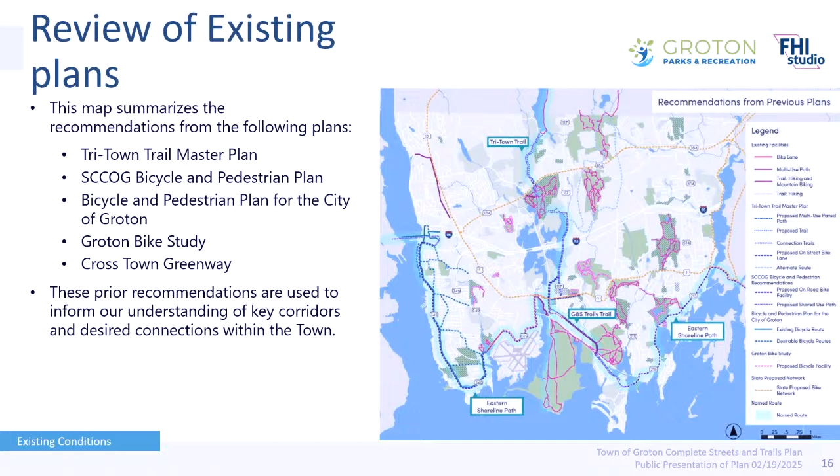As we put it all on the map, we see a lot of different facilities that have been recommended or planned. Some of these are just ideas, others are further in development, including the Tri-Town Trail Master Plan. SCCOG also did a bicycle and pedestrian plan recommending routes. The bicycle and pedestrian plan for City of Groton has their own plan. The Groton Bike Study, the Cross Town Greenway, which we've been actively involved with. We've mapped all of that, and that was really the first step in identifying where our network is and what needs to be connected and what roads should accommodate bicyclists and pedestrians.

We mapped out all your existing facilities, of which there aren't many when you look at bike facilities or facilities that can accommodate bicyclists. A lot of your facilities are bike ped - they serve both walkers and cyclists. We've got along Route 12 connecting to the sub-base, a really nice length of pathway that accommodates bicyclists and pedestrians. We've got a segment along Route 1, close to Poquonnock Plains Park and approaching the middle school. We've got the trolley trail here, a little tiny segment on Gold Star Highway.

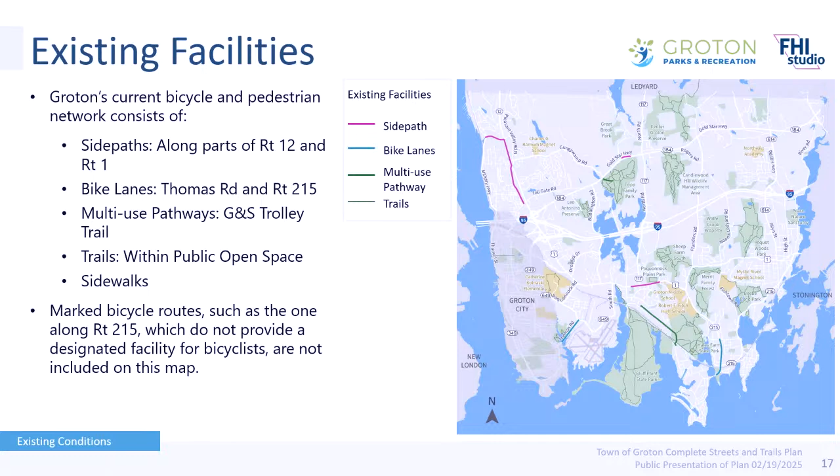It's really more of a wide sidewalk than anything, and then a few bike lanes, on Thomas Road and 215. But these things are scattered, and at best they're a mile long, quarter mile, half mile. So that really speaks to a need to connect, to infill and connect all of these.

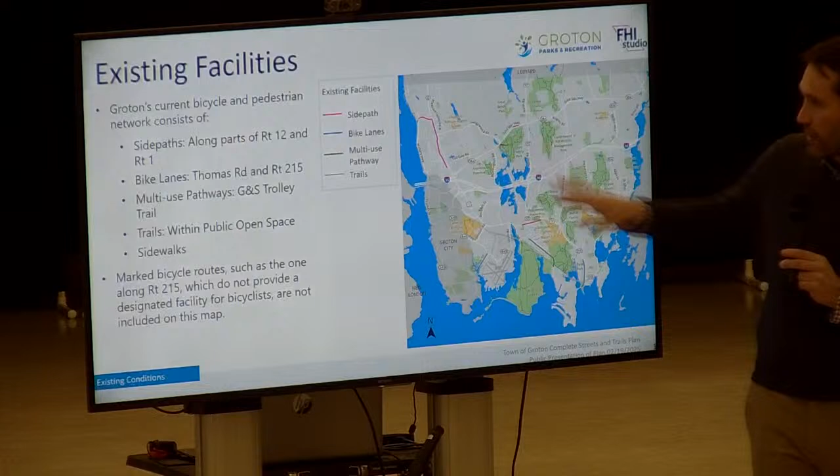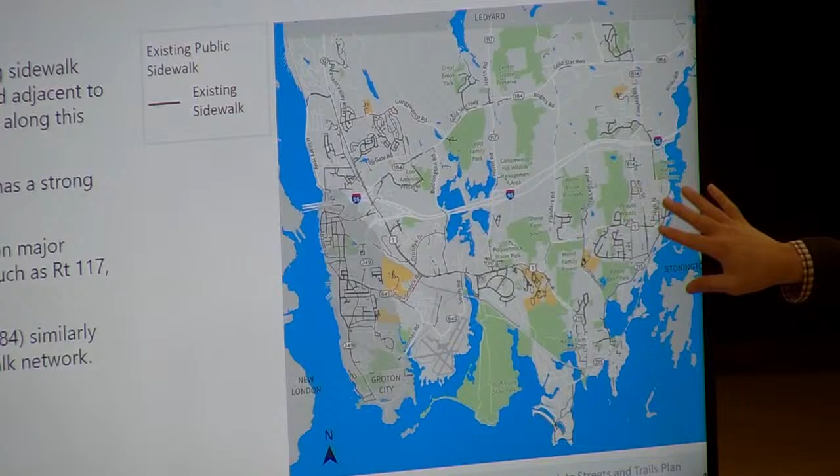We see the same when we take a look at your sidewalks - I realize you have a hard time seeing from back there on a small screen, so I'll try to describe it. You do have sidewalks across town, but the network is very fragmented. Sidewalks on one side of the road, but not the other. Sidewalks with gaps for one property, several properties for a mile, whatever it may be. So we've also provided recommendations for strategically connecting this sidewalk network so it's possible to walk without having to walk in the road or cross the road to get to the sidewalk on the other side.

Early in our work, we try to understand where the busy roads are. Busy roads are really challenging for obvious reasons. They carry a lot of traffic, the speeds are often higher, and it's difficult for pedestrians to walk in the road with that kind of traffic, for bicyclists to cycle in the road with that kind of traffic. So we know that these roadways here are going to be challenging. These are principal arterial and minor arterial and collector roads, many of them state highways. Fortunately, we have a lot of data available for many of these roads, unlike local roads for which we might not have speed or volume data.

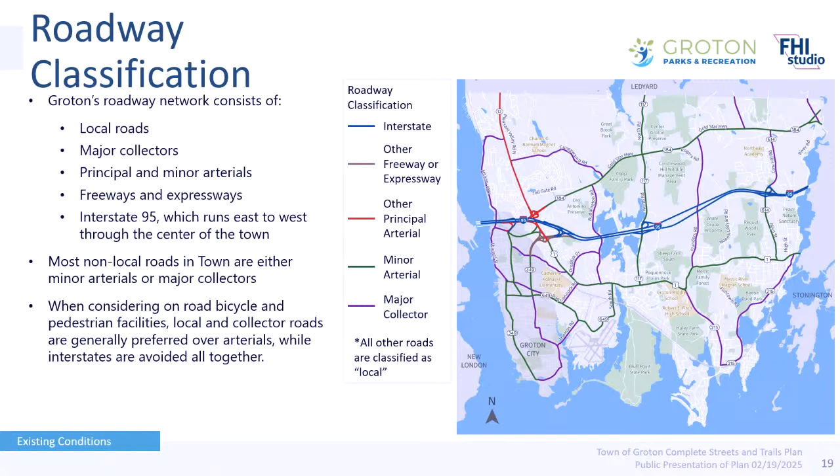So we can understand what the needs are. The recommendations we make are based upon multiple factors, but two very important ones are traffic volume and speed. Traffic volume makes it very uncomfortable for someone to walk or bicycle in a road with a lot of vehicles for obvious reasons. It also, just by factor of numbers, increases the probability of a crash occurring because there's more vehicles. Then speed is the other factor, and speed is really the primary safety factor. Lower speed roadways, even those that carry a lot of cars, if they're very low speed, tend to be safer roadways than higher speed roadways that carry less traffic.

So these are the conditions we're aware of, and we know we can't really change traffic volume. You can change speed a little bit with certain improvements, but we're very limited on our state highways - we can't do aggressive traffic calming. So we don't have a lot of control over speed either. Periodic enforcement can help, but that's only temporary.

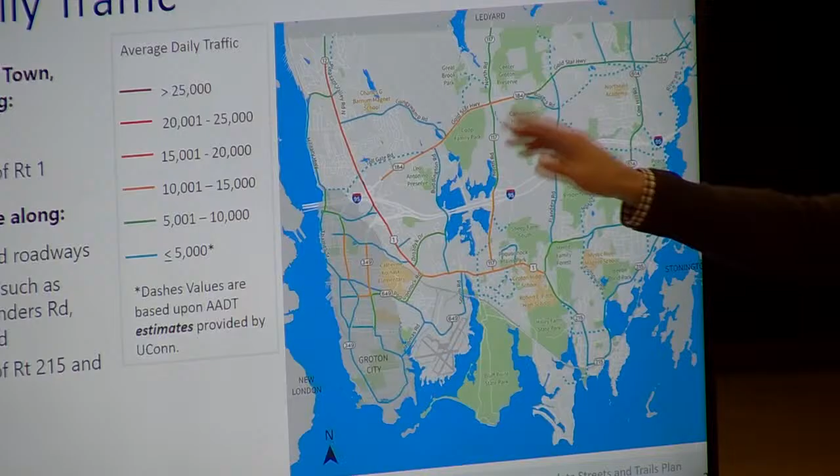Okay, so I talked about volume, and I'll do my best to keep the mic up here. Your heaviest traffic volumes, and this should come as no surprise, are on Route 1 - that's the orange, red, and orange lines here - Route 12 right by here, between Route 1 and 95, and as I said earlier, Gold Star Highway, the western part of it. The green and blue lines are lower in volume - not like a neighborhood road lower, but a little lower. So on these corridors, generally speaking, anything red or orange, we want to keep bicyclists and pedestrians off the road. We need improved sidewalks, and to provide a facility that's off the road.

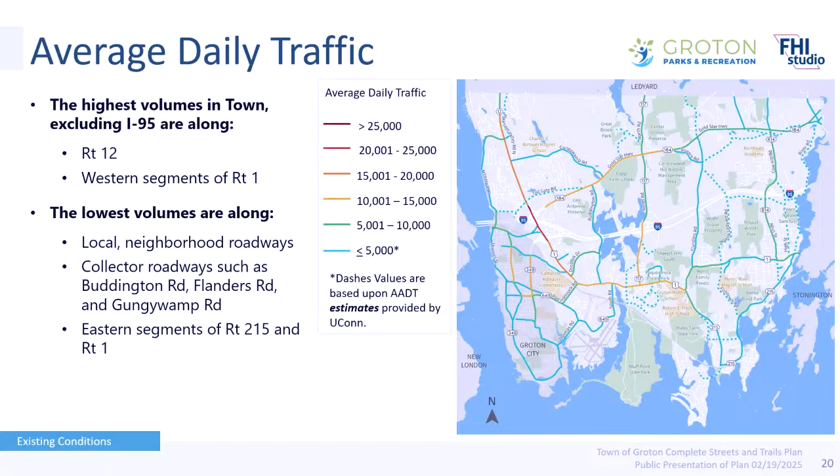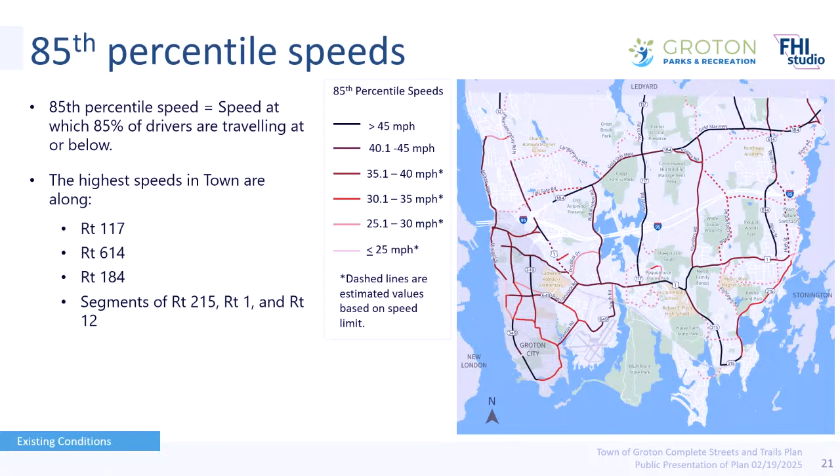And then the speeds - these are real challenges. The darker the line is, the higher the speed. So Gold Star Highway has some of the highest speeds in town, above 45 miles per hour. Segments of Route 1, of 215, so this is also a challenge. Even 117 - along the length of 117, the speeds are pretty high on this corridor right here.

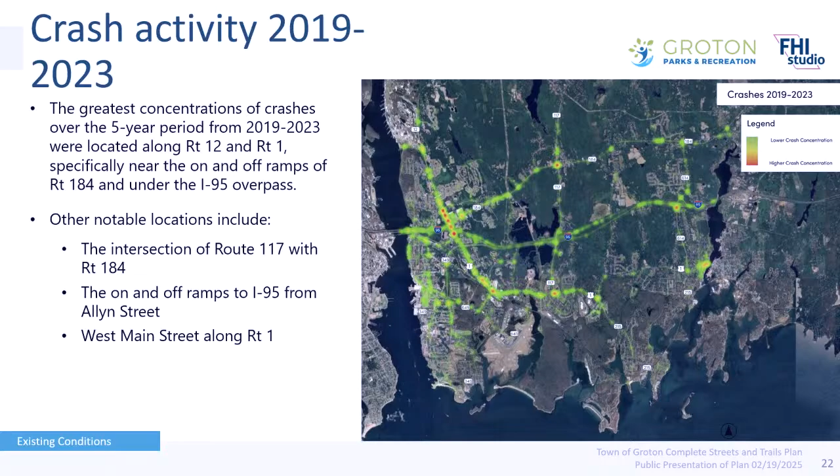We took a look at crash activity, and what we see is that crashes are really highly concentrated along Route 12 near the I-95 interchange and along Route 1. Crashes occur, generally speaking, following this pattern - they occur where you have the most traffic, and they occur where you have the most intersections, and that's exactly what we see. So moving pedestrians and bicyclists safely through intersections is also a very important part of this work.

The road leading up to the intersection is important to provide that facility, whether it's a sidewalk or whatever it is. But then you need to provide a safe crossing. In the toolbox we've developed a lot of guidance on how to provide safe crossings for both bicyclists and pedestrians.

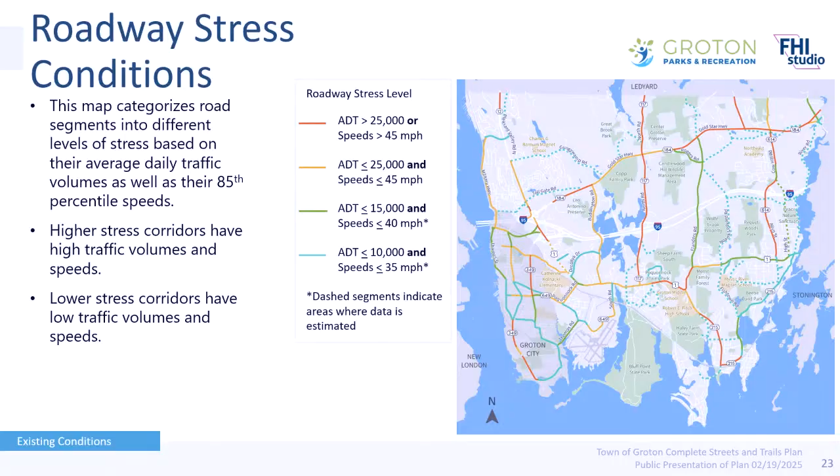Finally, we take all that and merge it together into what we call a stress analysis. So we take the volume and layer on top the speed and then the crash history, and we identify roads that we expect would be the highest stress for a user, whether a bicyclist or a pedestrian, if they were in the road. What we see is that the stress actually shifts out to the east a little bit, and that's because of the higher speeds up here.

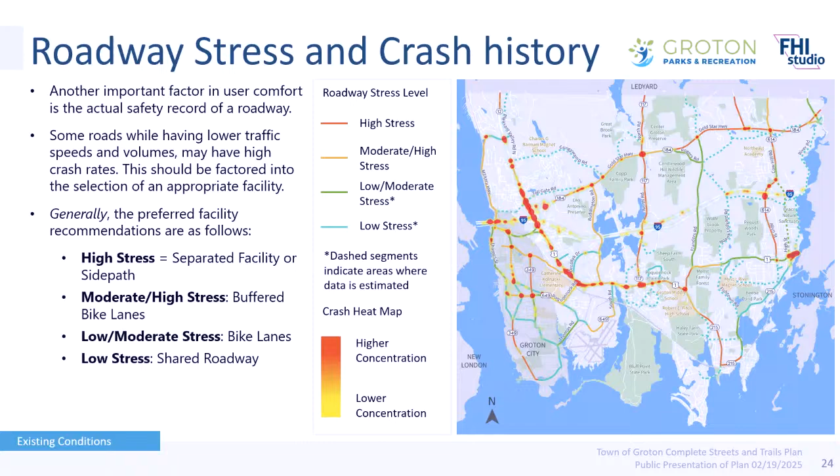And that's what it looks like with the crash data layered on it. We did also inventory bicyclist and pedestrian crashes, and we had a very heavy concentration of those along Route 1 and 12, near 95, and at some other major intersections like 117 and Route 1.

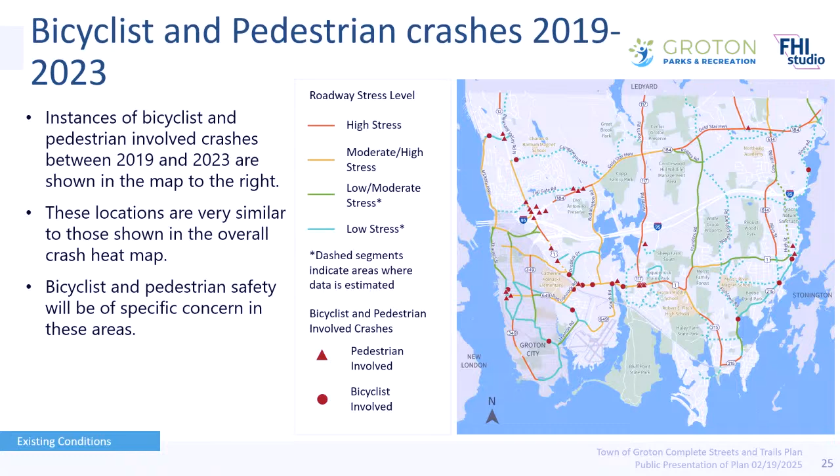And finally, as I talked about earlier, we also want to be able to prioritize our recommendations. So where would you start? What areas have the highest priority for providing improvements? We did a demand analysis, and we call this a heat map because the areas in red suggest the highest demand.

We do a demand analysis by mapping all the schools, any universities or higher education, parks and playgrounds, town facilities like this one, major employment locations, high density housing, retail corridors. We map all those, assign values to them, run it through GIS, and it creates mapping for us.

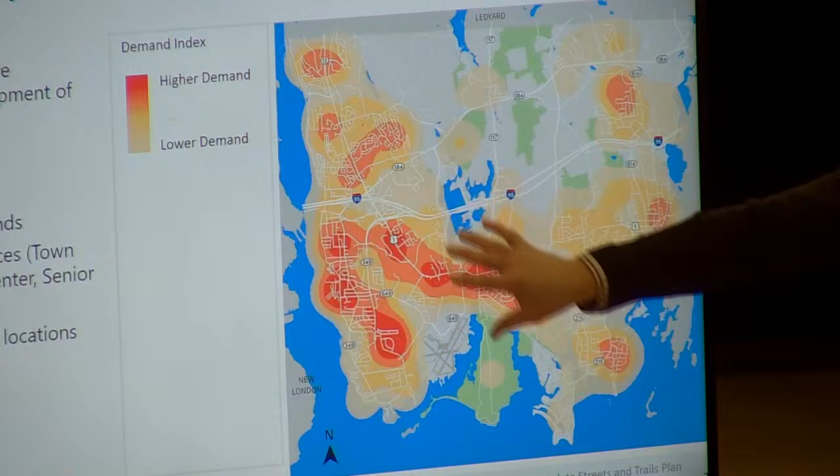So all the areas in red, pink, and orange are where we expect the most activity of people moving around, either originating from a place or trying to arrive at a place. That's for all kinds of trips, which also means these places are likely to generate the most demand for bicyclist and pedestrian trips too.

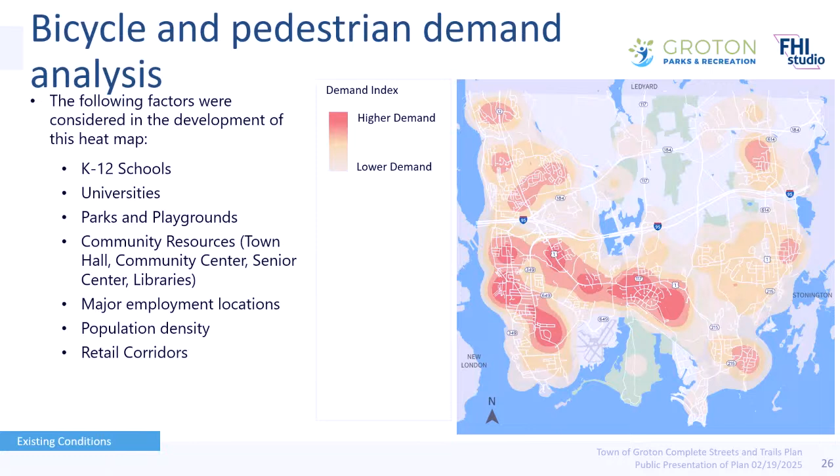So this factors not only into the recommendations we made about whether to provide new sidewalks or bike paths, but also how much of a priority it is. The areas in red are going to be identified in our implementation recommendations as higher priority for that reason.

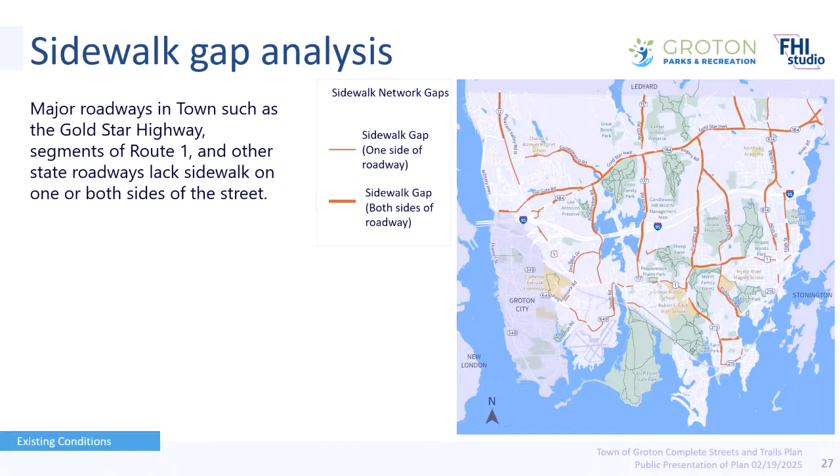As I mentioned earlier, we took a look at your sidewalks, and the red lines indicate where you have the biggest gaps or deficiencies, with very little to no sidewalk network. A thick red line means there aren't sidewalks on either side of the road. A thinner red line means sidewalks only on one side. We've mapped all that out and are developing recommendations for that as well.

Okay, so let's talk about the types of facilities we're recommending. That starts with the guidance document. There's a lot of federal and state level guidance as to how to recommend these facilities, how to plan them, how to design and build them.

We review all of that, and the recommendations we're providing to the town are based upon all of this work. Some of this work is very recent, some documents have come out or been updated in the past year. For bicycle facilities, we're recommending a range of different facility types for all the different conditions.

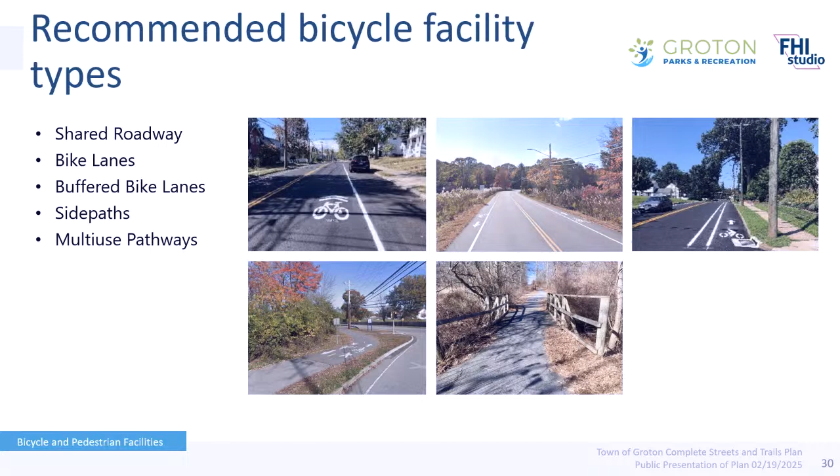I'll go through those one by one. First is a shared roadway. Shared roadways are really only appropriate for lower volume, lower speed roadways where people are probably already walking or bicycling in the road fairly comfortably because speeds and volumes are lower.

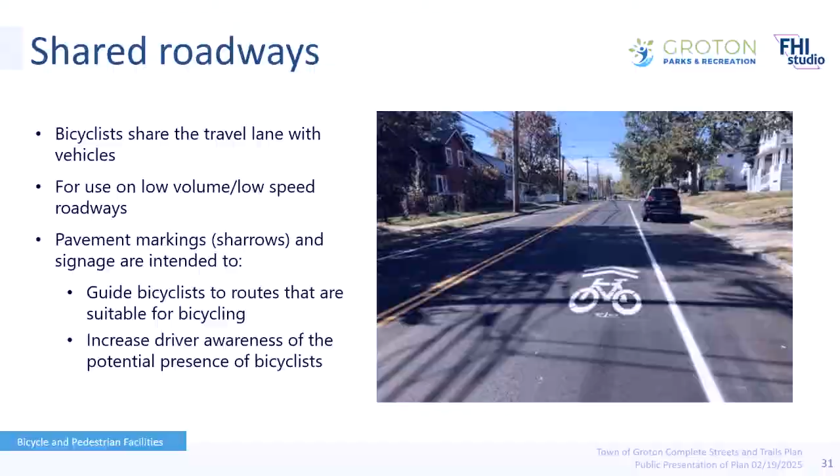This facility is just marked by pavement markings like this and occasional signage. The purpose is to direct bicyclists toward roads that are more suitable based upon traffic conditions, and to make drivers more aware to expect the presence of bicyclists. That's the value of these facilities.

They are low cost, so you can build out a lot of network like this, but they have to be used very strategically, only in appropriate conditions. You would never put this pavement marking on Route 1 and put up a couple signs that say shared roadway or share the road and call it a day — it's not the appropriate condition. But there are a lot of roads in town where this type of facility is appropriate, so we've provided recommendations to that effect.

Next are bike lanes. You do have some examples of bike lanes in town. That's basically where you have a shoulder on the roadway and space for bicyclists at the edge of the road. You provide signage and pavement markings, and that way you can separate out the traffic.

Now, we have to be very careful about the use of these as well. The roadway needs to be wide enough; there needs to be room for trucks to pass a bicyclist safely with 3 feet between them, which is the state law.

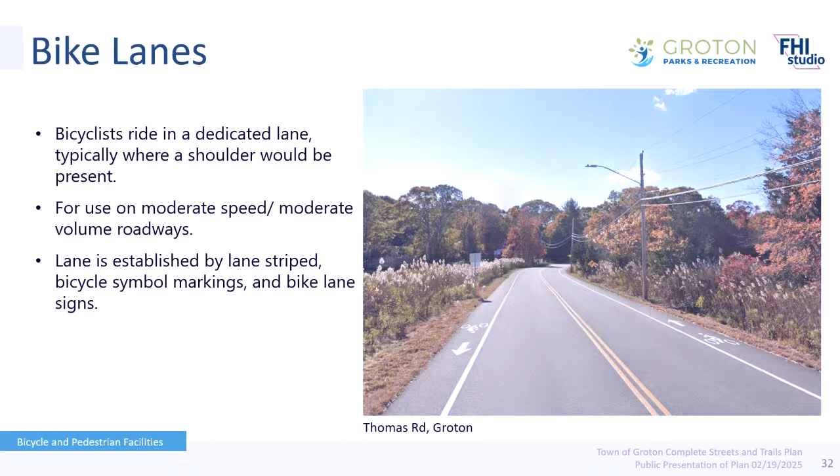These facilities can work on more moderate level traffic volume and speed roadways, but this alone still is not suitable for a corridor like Route 1. The traffic conditions are just too intense for this type of facility, but in this context it works okay.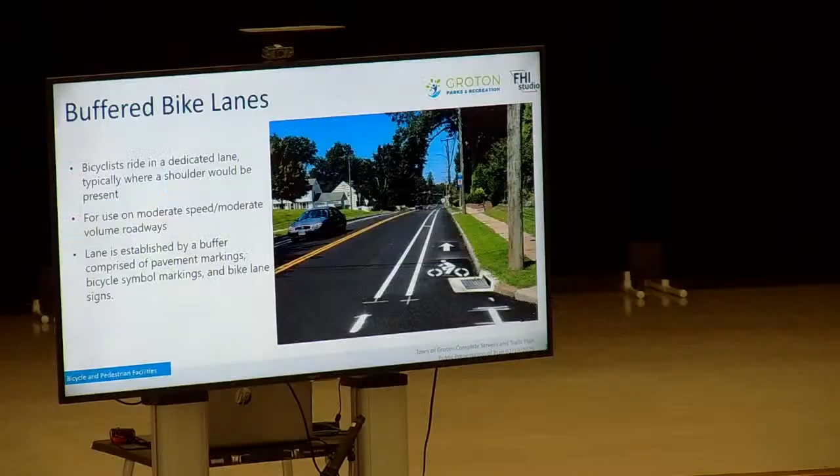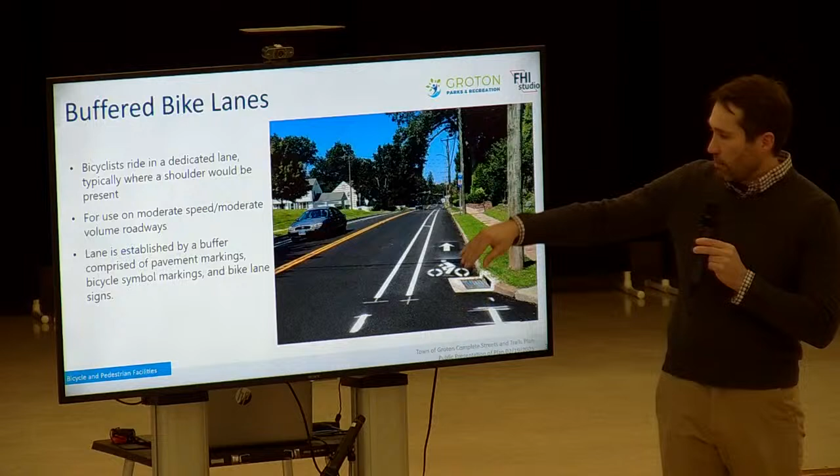Next are buffered bike lanes. This is where, if you have a little more space on the roadway, you create more separation between bikes and traffic by adding a pavement marked buffer, and you can reinforce this with traffic posts, PVC traffic delineators designed for in-road use. The advantage is that the state-mandated 3 feet, which can vary in width, is built into the roadway. The pavement markings are there, so you're almost guaranteed traffic stays here and bicyclists stay here, building in that separation.

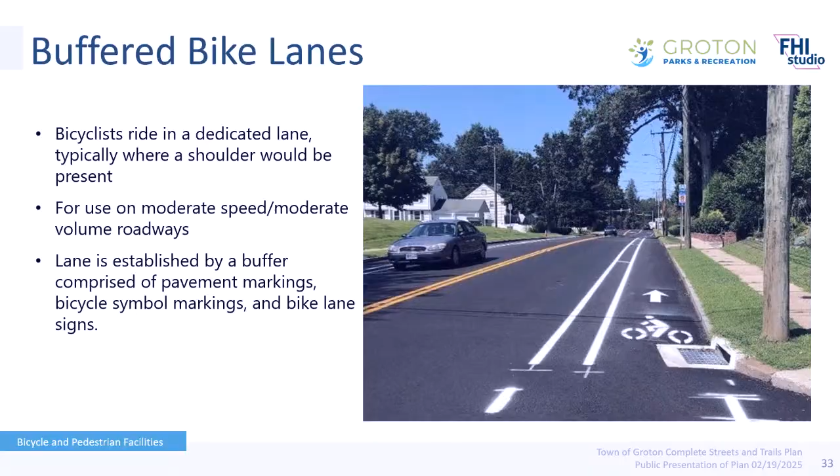You have to have space on the roadway though. Or if you widen the roadway to accommodate it, it's very costly. So there are limited conditions. We have recommended this type of facility, but there are limited conditions in town where you have the space to accommodate something like this.

The next recommended facility, off Route 12, which leads up to the subbase, is what we call a side path. A side path is like a sidewalk designed for both bicyclists and pedestrians. A sidewalk, which could be 4, 5, or 6 feet wide, is a lot narrower than a side path, which is about 10 feet wide or more. Side paths may or may not be asphalt or concrete, but the point is both bicyclists and pedestrians share a facility that is off the road.

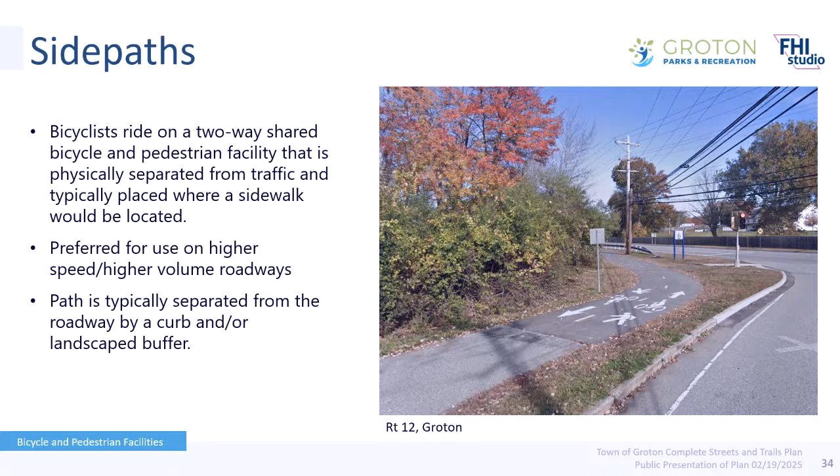Side paths are a tool we think is very appropriate for a lot of conditions here in Groton. We've recommended side paths along a lot of the corridors. This is not without its challenges. First of all, to construct, it's a costly facility. The intersections and driveways have to be treated appropriately so as not to create a hazard. You have to have good sight lines at driveways and intersections.

But in many cases, such as along Route 12 or any other heavy volume roadway, the safest, most comfortable option for bicyclists and pedestrians is to get them off the roadway. Because your pedestrian and bicycling rates here in town are relatively low -- when you get into the center of Mystic and some other areas you have a lot more pedestrians, but as you get further from those retail and commercial areas you have very few pedestrians and very few bicyclists -- it's possible for them to share a facility without a lot of conflict.

Finally, shared use pathways -- the trolley trail is an example. A side path and a shared use pathway are really the same type of facility; a shared use path tends to wander away from the road, while a side path follows the edge of the road like a sidewalk. The trolley trail is a great example, and we've recommended creating new connections up to the trolley trail, by example along an easement, and expanding the use of these through town to better connect the trails and existing paths you have.

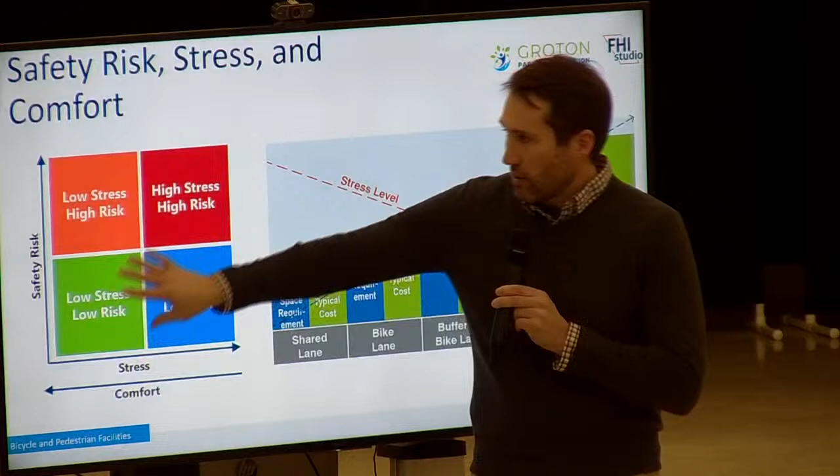These facilities aren't all the same. Our goal, generally speaking, is a comparison of risk, stress, and comfort. Ideally we want everything to be low stress, low risk. In some cases we might have a condition that's high stress just because there's a lot of traffic, but the way we've designed it, it's low risk because we've separated bicyclists and traffic, or pedestrians and traffic. What we definitely don't want is high stress and high risk -- we want to stay down here, not up here. That's our general approach.

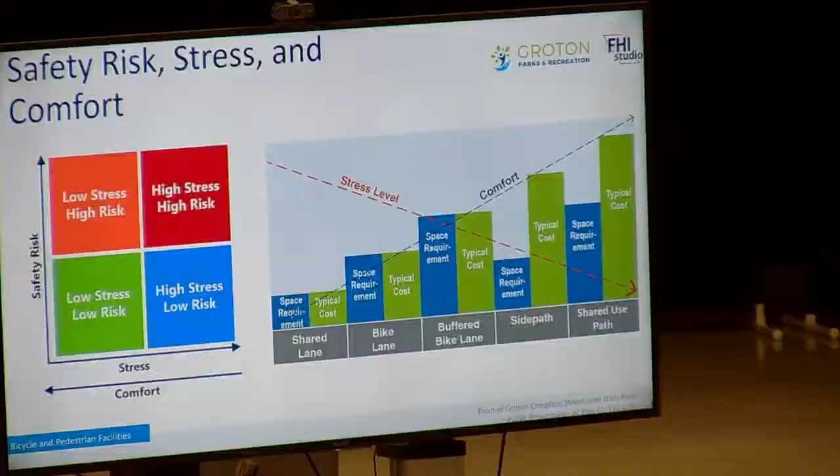With these different facilities, they have different advantages. A shared lane doesn't need a lot of space and has a lower cost, but it might not be as comfortable as a shared use pathway. So there are trade-offs as we go across. Side paths and shared use paths tend to have higher cost and require more space, but they tend to be more comfortable because there's more separation from traffic. So we're always balancing that.

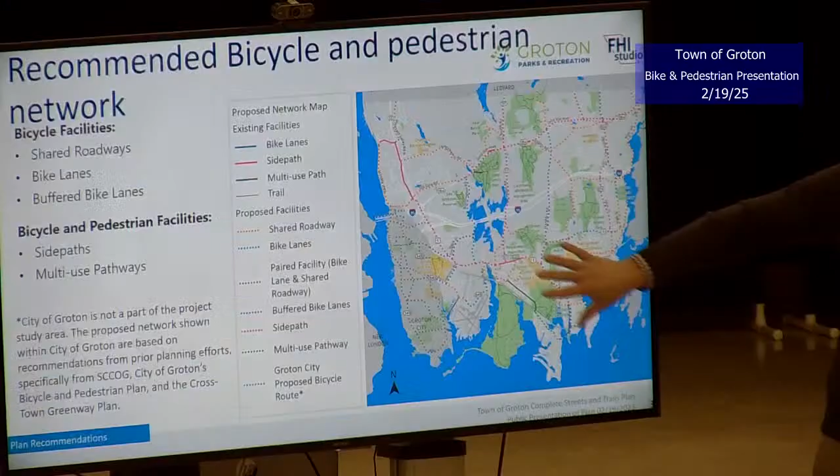All right, let's talk about the recommendations. When you came in, you probably saw a couple maps - one for bike facilities, another for sidewalk connections. What we've recommended are lots of lines connecting everywhere. Everything dashed means it's recommended by us; everything solid means an existing facility. We've got a network covering the entire town, connecting every park, open space, school, neighborhood, and other destination with a range of facility types, including shared roadways, bike lanes, buffered bike lanes, side paths, and shared use pathways.

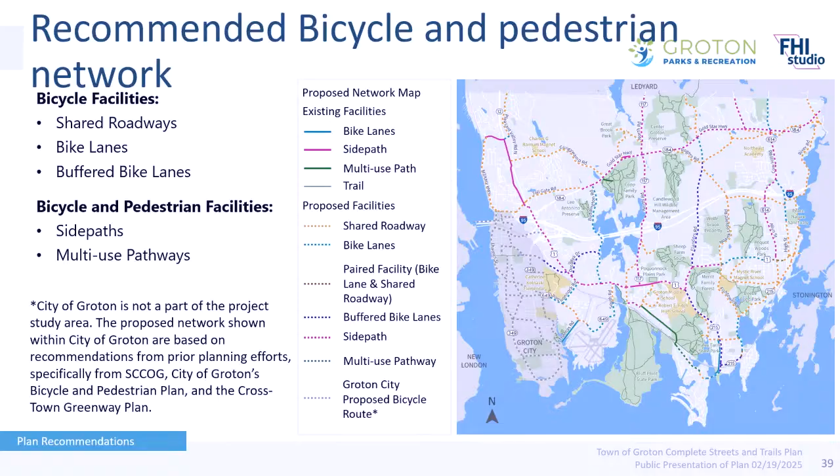So that's the network. We've got a lot of information behind all of these. We've inventoried each segment, and we've got a table showing the speed and volume conditions, how wide the right-of-way is, and very importantly, what the cost might be to build out that facility. The same is true of sidewalks. We propose providing connections between all of those facilities. Now, the range of improvements we're talking about are, as you might imagine, in the tens of millions.

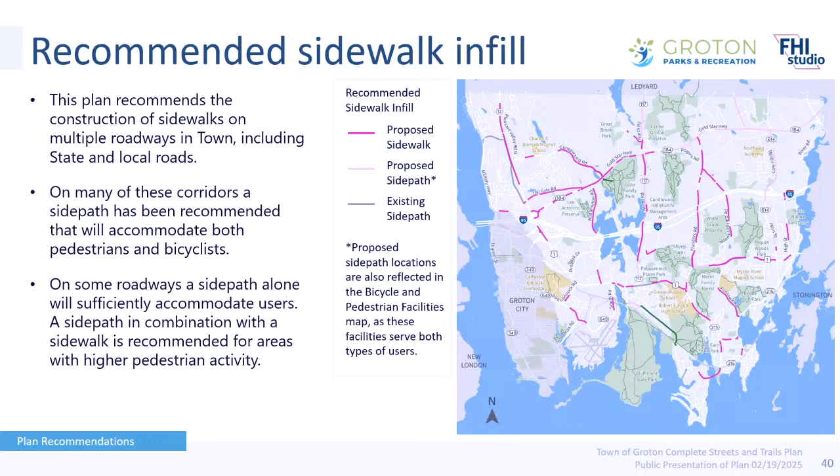Yes, sir - the town's not going to be able to build this out in the next 5 years. This plan creates the opportunity to pursue grants and puts the town in a very good position to pursue grants on a project-by-project basis.

Additionally, the DOT now requires, whenever they improve a roadway - which includes resurfacing, drainage improvements, whatever it may be - their own internal policy, which we worked with them to develop, requires them to identify what type of facilities should be provided for bicyclists and pedestrians, identify the cost, and determine if it's feasible to include it in the project. They really have to identify it as not being feasible for that improvement not to be included. Your plan would help advance that, because the town could provide it whenever an improvement's being made, identifying the recommendation, and it's incumbent upon them to test the feasibility of it and potentially finance it.

All right, so that's the value of this effort. Now we have something like 60 miles of improvements that we've recommended for bicyclists alone, not including sidewalks, in which case a lot of them run parallel.

We were also scoped to take a look at 5 different corridors and take those to a level of design that would help us better understand the feasibility of making those improvements - specifically what type of improvements might need to be made, what the property impacts might be, and what the cost would be.

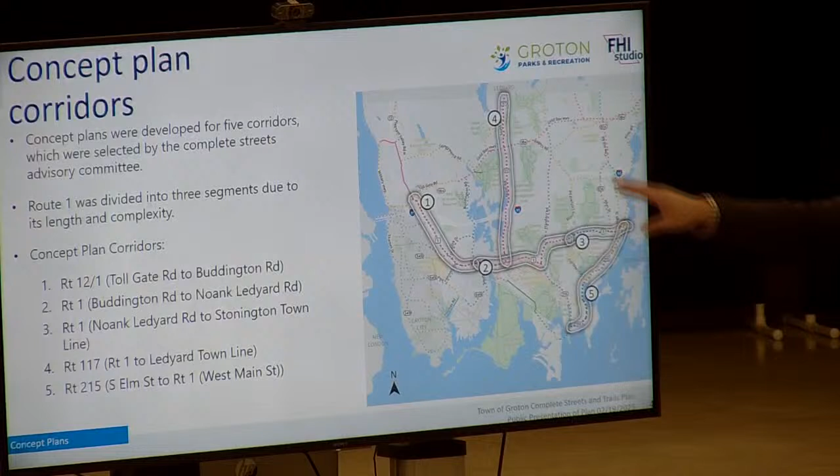And so we've developed concepts for 3 different corridors with 5 different project areas. So Route 1 - we've done all of Route 1, including the western part at Route 12 and Route 1, the middle part at Hamburger Hill, and the eastern part approaching Mystic and through Mystic. We've also done Route 117, North Road, and Route 215.

So we've done schematic level design that looks like this. We've got at least 20, maybe 30 of these sheets. We identify the types of facilities that are there, where the curb is, where the property lines are, what the grades are, what the intersections look like, and then we show the recommended facility - in this case a side path approaching Route 1, connecting to the existing pathway that goes up towards Route 12.

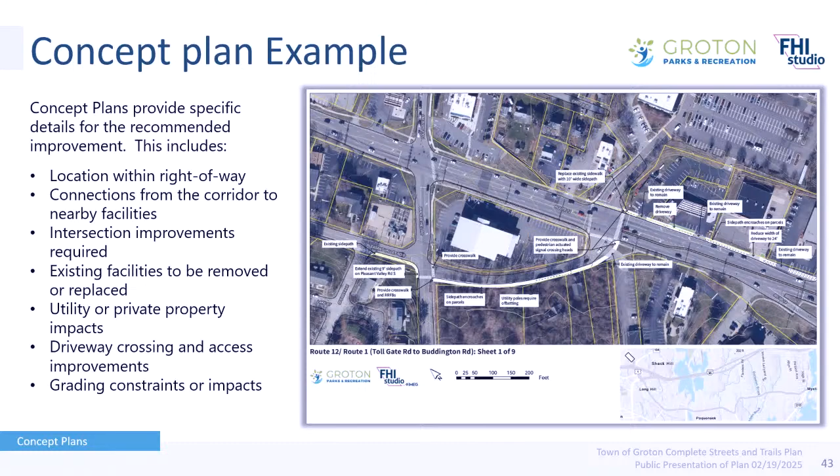Potential driveway impacts and how to treat driveways, potential utility impacts, grading constraints, retaining walls needed, intersection improvements such as pedestrian crossing signals - we've done that for all of those corridors, and we're developing cost estimates for that as well. We have done planning level cost estimates for all the facilities we've recommended across town.

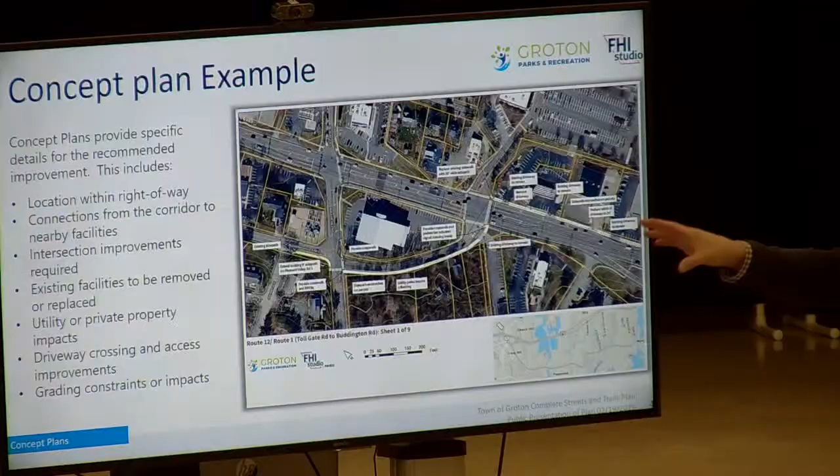These will be more detailed and more accurate. These plans will be really advantageous for the town - since they're all state roadways - to work with DOT in starting to plan for and provide improvements along these corridors. Our goal along Route 1 is to keep bicyclists and pedestrians off the road and on a shared facility.

And we've selected the side of the roadway that's most favorable based upon the conditions. There are still a lot of challenges in the form of driveways. We've generally favored the side of the road that has fewer driveways, but there are still driveways. So this is a long-term vision. It's nothing that would be built out over the next couple of years. It would need to get financed. It would need to go through a lot of design and coordination with property owners. There may be some easements required or sliver takings on properties, because many of the property lines come out into the state right of way. So this is a big idea project.

But Route 1 is the most important crosstown connection you have. 184 is another important crosstown connection, but you have very little population there and fewer destinations. Route 1 is really the heart. It connects everything, and it's very difficult to get across town, all the way across town, on any other corridor without somehow landing on Route 1, even for a short segment. So it's an incredibly important corridor, and that's why it was included in this process.

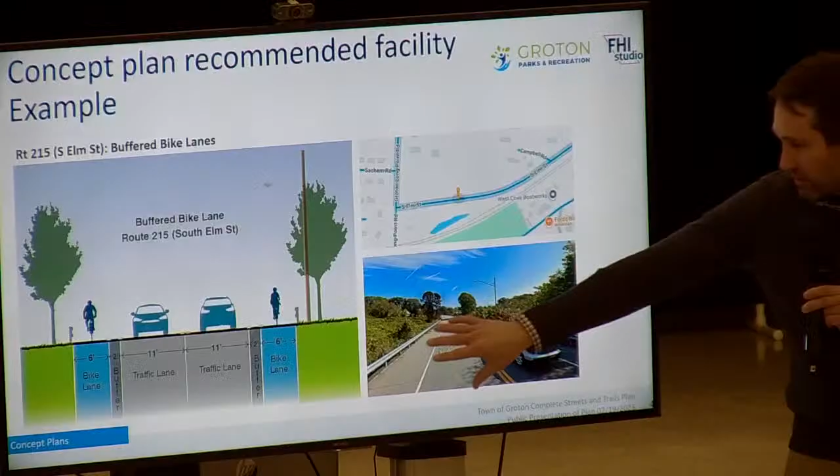And for each of these corridors, and this is 215 as an example, we've developed recommendations that are appropriate to that specific corridor. On 215, fortunately, there's a lot of pavement on this particular segment on South Elm Street. The space is there, and so this is a perfect candidate for buffered bike lanes. People, I'm sure, already ride or walk on that shoulder, and so that's a perfect space for an improvement, which would not require roadway widening. It's really about pavement marking and signage.

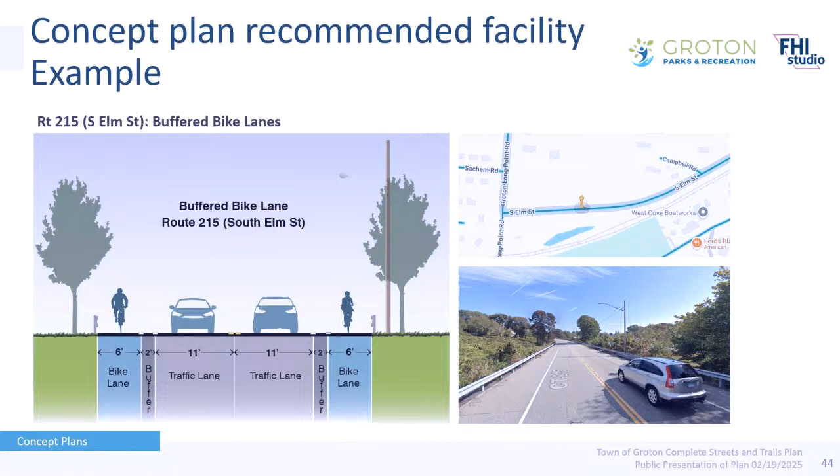As I mentioned earlier, we developed a toolbox. The toolbox specifies exactly how all these facilities should be planned, designed, and built. And we've recommended a process for the town and potentially for the committee to be involved in whenever a project is initiated or a project is being improved or recommended.

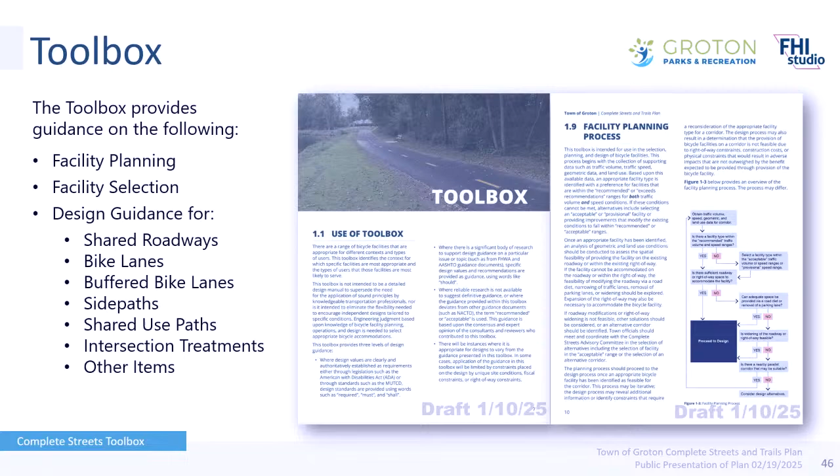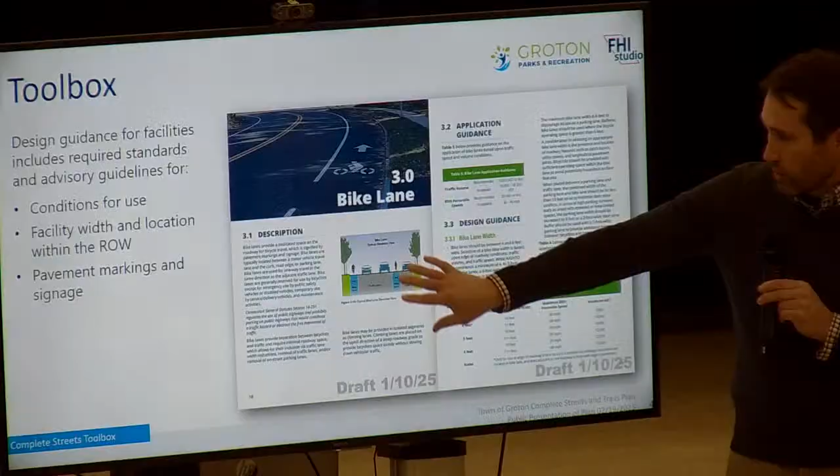How do you make those decisions? What process do you go through? So we've developed a process that really helps guide the town: what information do you collect? How do you engage with property owners? How do you make decisions? And if you figure out that a corridor really can't provide the improvements being requested, what do you do from there? Do you just stop, or do you take another approach? Do you go back and revisit your assumptions and start from scratch? Or do you maybe look at an alternative corridor? So we've provided that guidance within the toolbox, along with details for all the facilities I just walked you through, including sidewalks, improved intersection crossings for pedestrians, trailhead connections, and that sort of thing. And giving an example, each section, like bike lanes, we've got visuals that help show what it looks like, the conditions where it should be used, how wide you make these things under different conditions, et cetera.

All right, demonstration projects. So we were asked to identify and develop recommendations for projects that the town could take on in the near future, low-cost projects that they could do in the next year or so. And we've identified three candidates. To date, we've actually completed one.

And the first project, and this was really an idea that was brought forward by members of the Complete Streets Committee, was to do what's called a traffic garden, which is a place where children can learn how to ride their bikes following the rules of the road. So we developed a traffic garden at the school near a playground. This was an empty paved space that had been at the former Claude Chester School, had been used as part of the playground. You can see the old four square lines there. And in a Saturday, we really transformed it into a pretty fun space that was getting use right away. Nicole, do we have a picture of the final one anywhere here? Yeah, later, good. It came out fantastic.

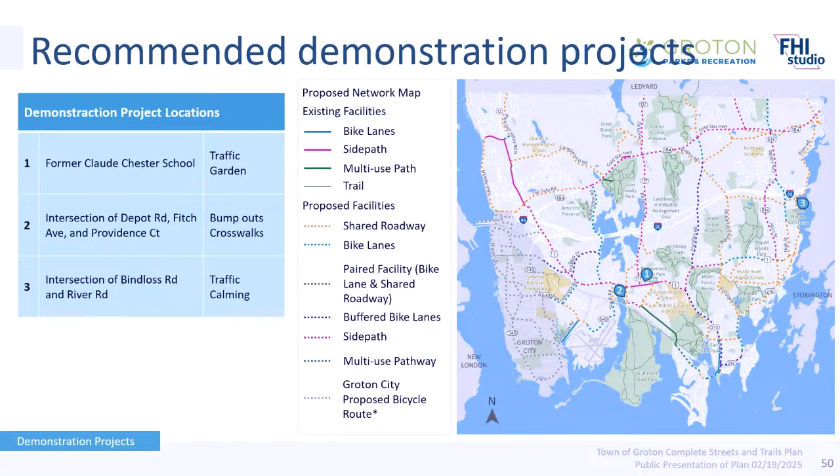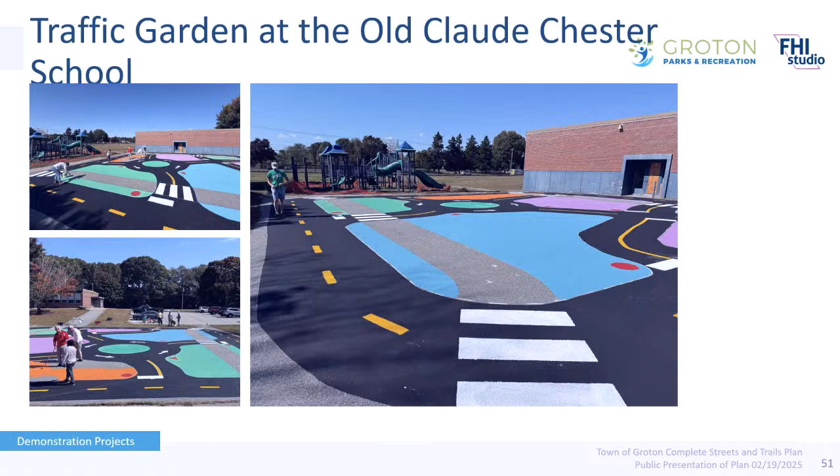So that was our first project, but we also have some more grown-up projects planned as well. Our demonstration projects here: Claude Chester School, we also have one recommended down at Depot Road, and another one up along River Road. And I'll show you what those look like. There it is. So in a day, we had a bunch of volunteers come out and transform it, and so now we have a facility where kids can practice yielding to pedestrians and stopping at stop signs and yielding in a roundabout, and we probably have some grown-ups in town that could practice how to use a roundabout there. It was really a fun project, and it's good to have a few of these built into a project that is otherwise looking out several years for many of the implementation items.

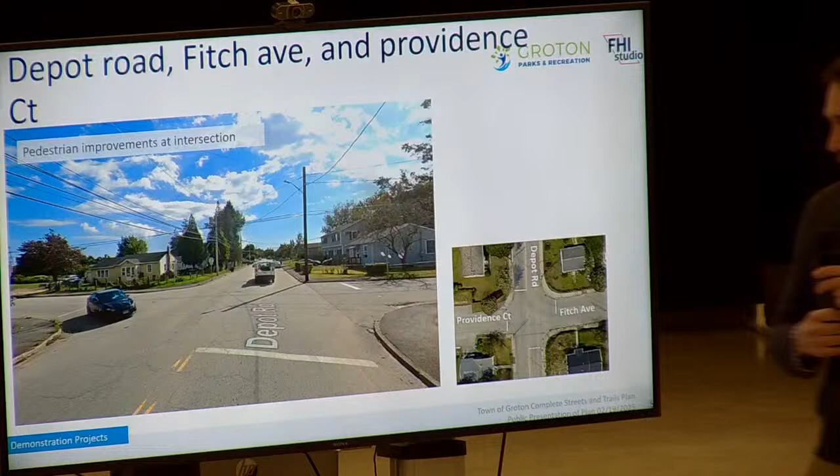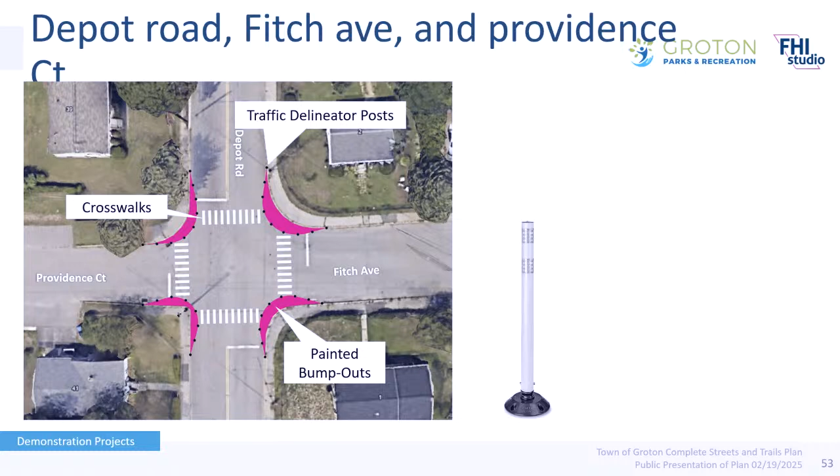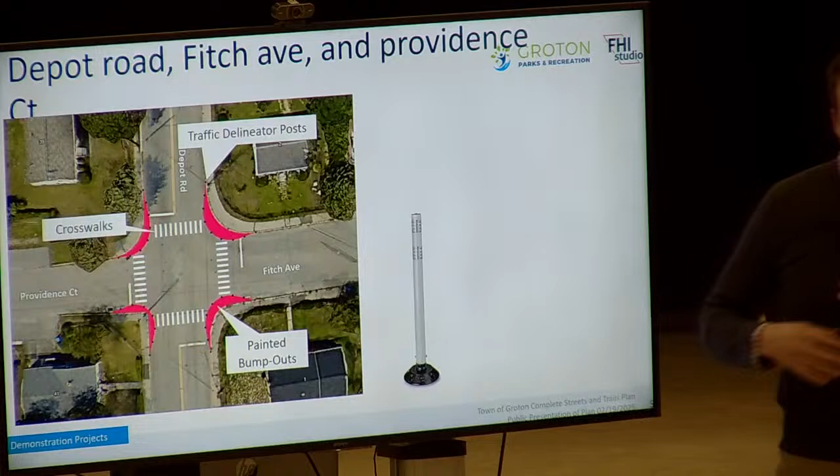Other short-term measures the town can entertain as we get into spring and summer include improving crosswalk conditions at Depot Road. You can see we've got a 4-way stop with no crosswalks at all, and I'm sure a stop that plenty of people roll through. So we've developed recommendations for providing marked crosswalks and choking that down with bump outs using traffic paint and traffic posts. These posts are designed so you can hit them without hurting your car, and the post doesn't get destroyed.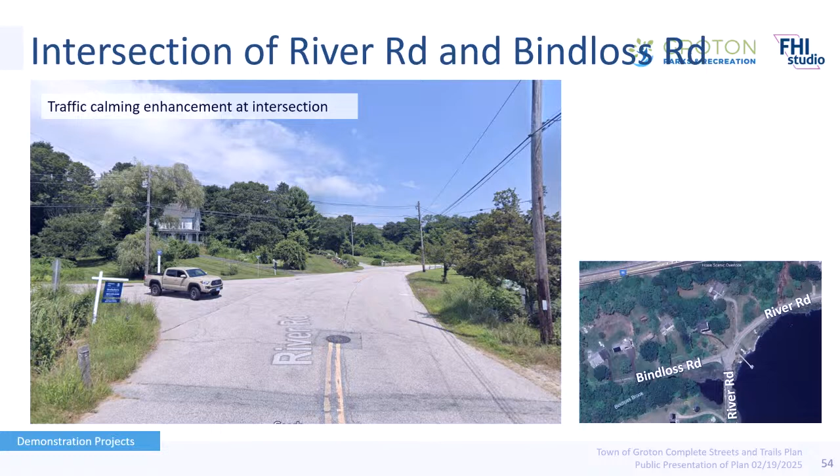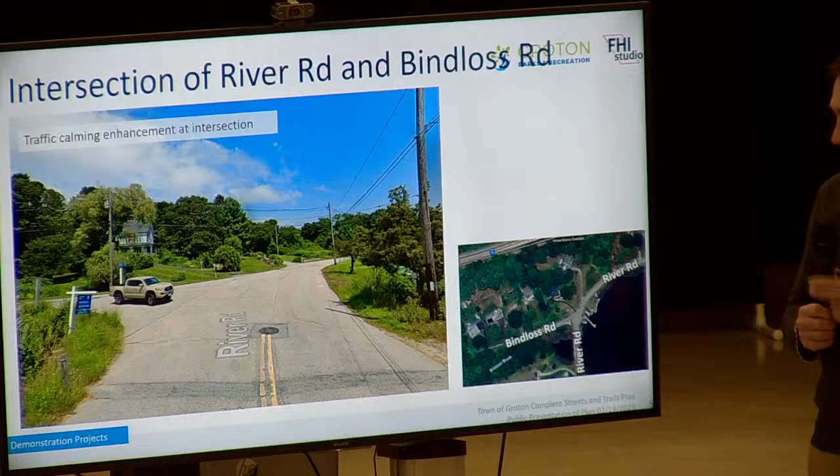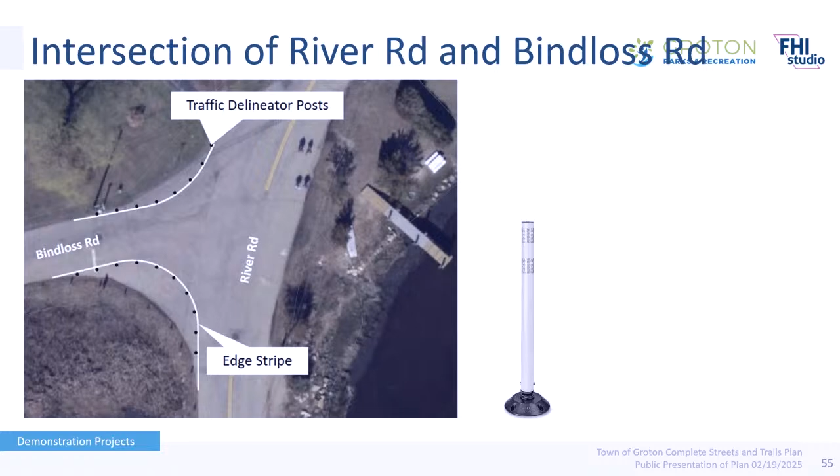The same goes for Bindloss Road. This is a really wide open intersection, and a lot of people actually walk and ride through here. It has a lot more pavement than it needs, so we've developed recommendations to choke that down and make it a lot safer. These are all proof of concepts showing that with some minor improvements, taking away some space rather than building things bigger, we can make it safer and more comfortable while it still functions fine. We've developed plans for each of those.

Another exciting extension of our work is with the town on the Crosstown Greenway. The Crosstown Greenway is a route, not really a new facility that's been built. It follows some existing facilities and roads, so you can walk on a sidewalk, ride a bike down the road, walk along existing trails, and hike through different open space properties, state, town, and private. It's intended to carry you all the way across town and connect to a regional system. Right now there's a little bit of mapping of the route, but there isn't any signage, informational signage, branding, or wayfinding out there. So we've worked with the town to develop all of that.

We've developed a logo for it, the Groton Crosstown Greenway, with several partner organizations involved. We're accommodating a lot of different types of users, people in wheelchairs, pedestrians, hikers, mountain bikers, and road cyclists. The signage helps guide users in the appropriate direction of a facility or trail that can accommodate them.

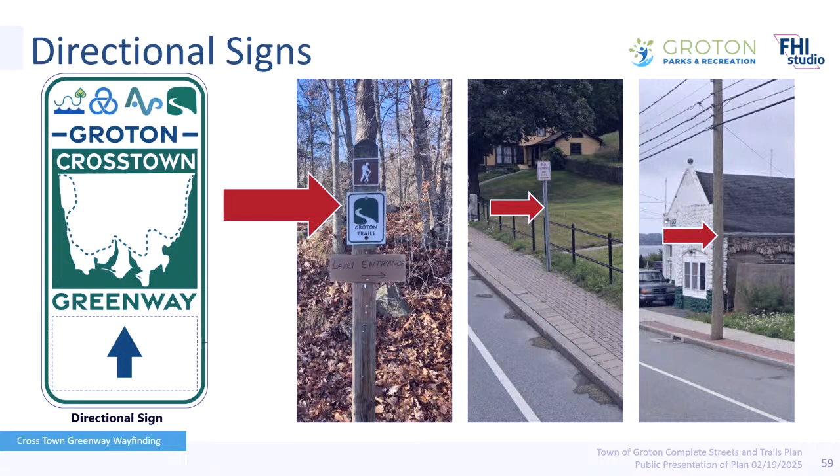By example, we would place signage using existing utility poles, existing traffic signs like no parking signs, existing trail signs, or new poles as well. We'd have wayfinding or directional signage indicating you're on the route and showing which way to go. There's a range of signage out there right now for these multiple open spaces and some of the trails, and we're recommending unified, uniform welcome signage all along the route, so there's a consistent look. That signage could still provide information about that particular open space, in this example the Merritt Family Forest, but at the same time be branded as part of the Crosstown Greenway route.

So we've developed a sign concept for that. We found a really nice example that the town liked, something kind of more rustic and rural, and based it on that. We developed specifications for a sign of that nature, for signs at the trailheads, and we've gone through the entire route from west to east. This particular sheet is one of around 12 or 15 of these sheets.

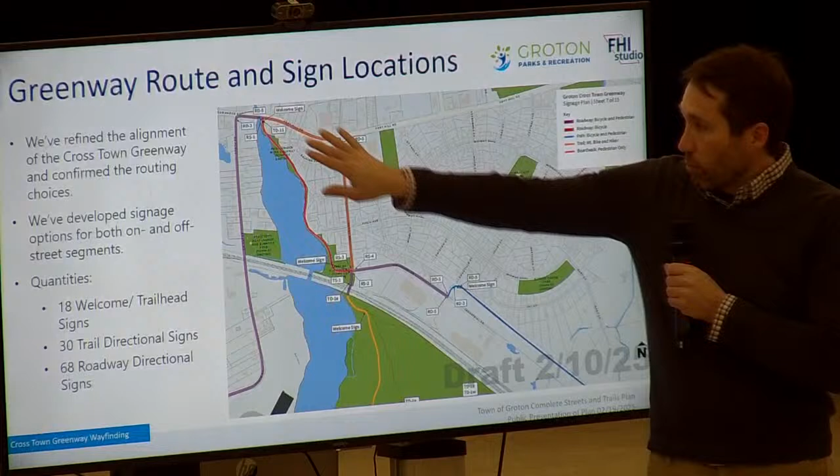In this example, we show South Road and Depot Road. The route would travel, so if you're a bicyclist, you would just go down South Road, knowing to stay on the route. If you're a bicyclist or walker, you'd use the sidewalk or walk in the road where a sidewalk isn't there. Here we have the boardwalk, and the signage would direct pedestrians to the boardwalk but direct bicyclists to stay on Route 1 and then go down Depot Road, where you connect to the trolley trail and go further east. So in this example, we show a dozen different locations where wayfinding signage could be provided, with different types of signage pointing different types of users in the direction they need to go.

We've provided this for the entire route, along with a complete list of the signage required and some basic cost estimates. The town has already, back in December when they were doing the budgeting, put in requests to get this started.

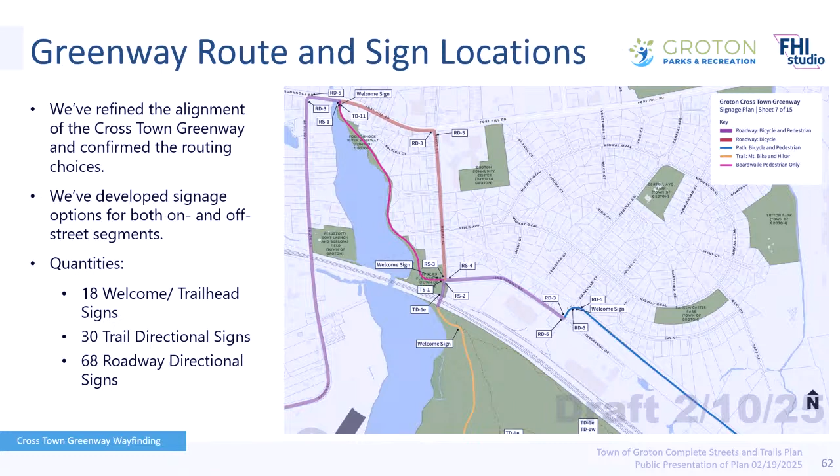Our next steps are to package up all this work. We've done most of it, and now we need to put it into a document that adequately represents the work done and the recommendations we've made.

We're also finalizing cost estimates for the concept plan corridors, and we'll present to Town Council on March 11th. It'll be a similar presentation, but at that point we'll have the draft document available. So, are there any questions or comments?

Yes, ma'am. Did anybody ever consider putting a bike path down the middle of 95, in between the north and south lanes?

Let's talk about the challenges of an interstate. Let's start with successes. The Gold Star Bridge is being improved to widen the existing sidewalk into a wider facility for both bicyclists and pedestrians. That's fairly monumental because it's I-95, it's a bridge structure, and one of the very few connections across the river. However, on either end, you quickly separate from the highway into local or state roadways.